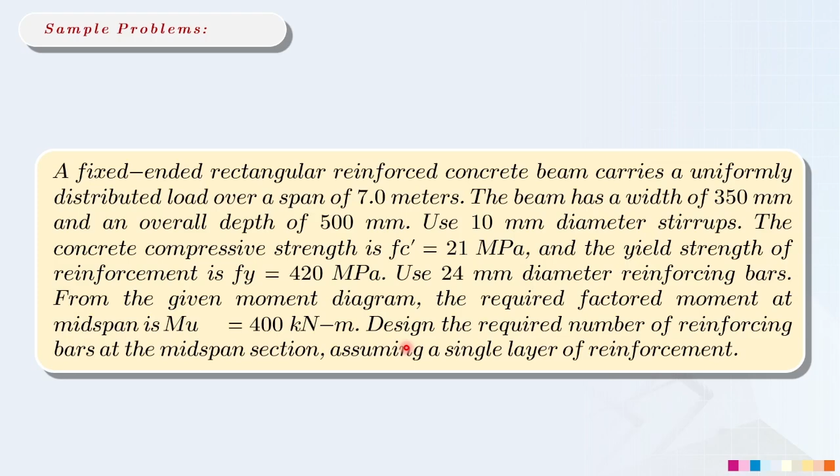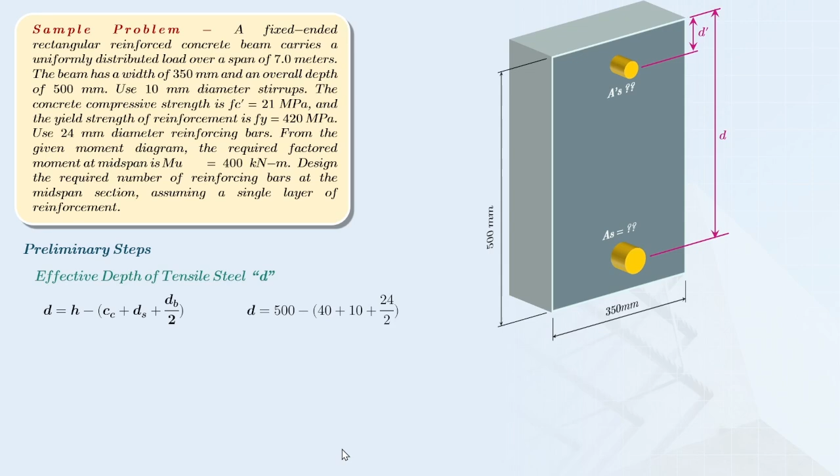So of course, one of the preliminary steps is we need to determine the effective depth at the tension, which is best to assume here that all of the arrangement for our reinforcement is only single layer, either in tension and compression. Okay, so let's determine the location for our effective depth for the tensile steel. So let's substitute all of the values here. So our effective depth is equal to 438 millimeters.

However, we need to also determine the effective depth for the compression steel, just to anticipate if this section qualifies now as a doubly reinforced beam. Okay, so by just simply adding the concrete cover, the diameter of stirrups, and then half of the main reinforcement, ang makukuha nating value dito is 62 millimeters.

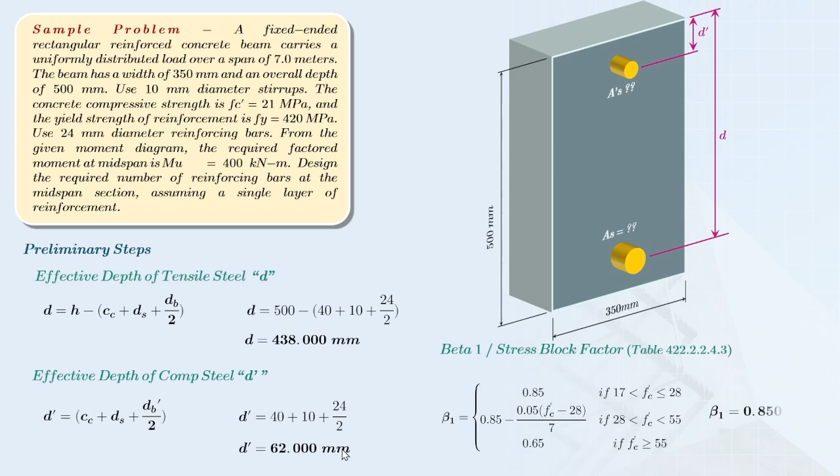Okay? So, one of the preliminary steps, we need to determine the value for our beta 1, which will rely on the value of f'c. However, f'c is 21 megapascal, so that beta 1 is now equal to 0.85.

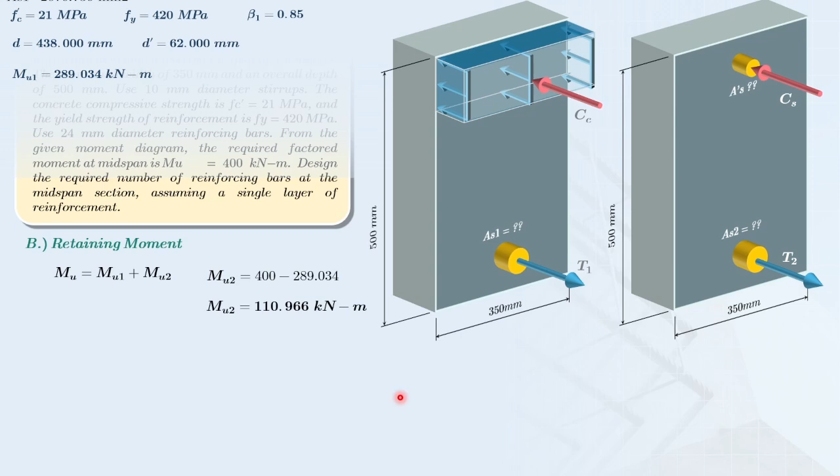So, kapag kinuha po natin siya, ang makukuha nating retaining moment, this is now 110.966 kilonewton meter. Ibig sabihin po niyan, ang sasalo for our design sa ating retaining moment ay yung mga bakal natin dito, especially on the compression steel. So, ibig sabihin, ito na po yung dadalhin niyang moment capacity natin. But first, we need to design for the tensile steel. Kasi yan yung importanteng part natin dito.

Okay, so let's consider from the controlled steel area. Ibig sabihin lang nito, class, is nasa maximum condition tayo. So para makuha ko muna yung first part, computing ko muna using yung steel ratio ng tension control. Then I will equal it to the total steel area. First part pa lang ito kasi nasa concrete pa lang tayo. Then divide lang natin siya together with your gross area B times D.

Okay? So let's cross multiply para makuha ko lang yung equation na magre-represent dito sa first stress diagram natin para kay concrete. Then kapag sinubstitute ko yung mga value para makuha ko yung first part ng aking steel reinforcement on the tension, ang makukuha ko dito is 2,076.736 square millimeter. So yan yung first part. Ibig sabihin, itong steel area na nandito, nire-represent niya yung para sa concrete. Kaso kasi nasa doble tayo. So, kailangan din natin ng second steel area para sa ating compression steel.

Alright, so let's design for the tensile steel ulit. However, ang magiging consideration na natin dito ay yung para doon sa ating second part. Okay, so on this retaining moment natin, ang ginamit ko pala dito by the way is yung kapag nag-moment ako sa compression. Kapag nag-moment ako sa compression, ito yung magiging axial tensile force ko. Then together with the derived natin para sa kanyang moment arm. So para makuha ko yung second part ng aking steel area, ang makukuha ko ditong value is 780.744 square millimeter.

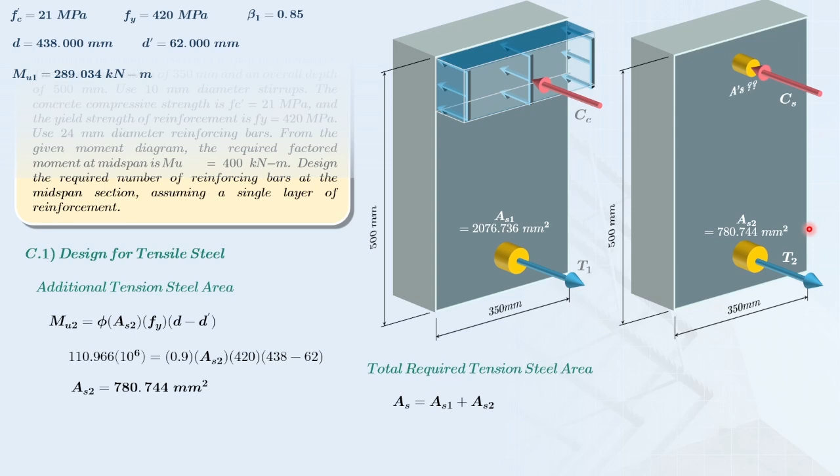So para makuha na natin yung total tension steel area, what I need to do here is ipag-add ko na lang sila. Since dalawa lang, hinati lang naman natin sila sa dalawang stress diagram. So, i-add ko na lang sila so that ang magiging total required tension steel area ko, this is now equal to 2,857.48 square millimeter. So, yan na yung magiging sagot ko, kung ang tanong ay steel area.

So, however, i-design na rin natin dito kung ilang piraso yung gagamitin natin from this total steel area natin. What we need to do here, i-divide lang natin siya sa isang pirasong 24 mm na bakal. So that yung number of pieces, this is now equal to 6.316. Palagi niyong tatandaan, kapag design ng number ng bakal, palagi po tayong round up. So galing sa 6.316 magiging 7 pieces of 24 millimeters. Kaso, please take note, tensile steel pa lang po yan.

Kasi, since tayo ay nasa doubly reinforced beam, kailangan natin i-consider yung compression steel. Para sa ating compression steel, ang gagamitin na natin dito is this formula. Please take note, kinonsider ko dito yung pag-minus ng 0.85 F'C, considering na hollow na po yung area para dun sa concrete. Alright, so let's substitute the value. By the way, ginagamit ko dito ulit ay yung para sa retaining moment. Dito po ako nagbabase ng aking second bending moment or yung ating retaining moment dito sa stress diagram na ito.

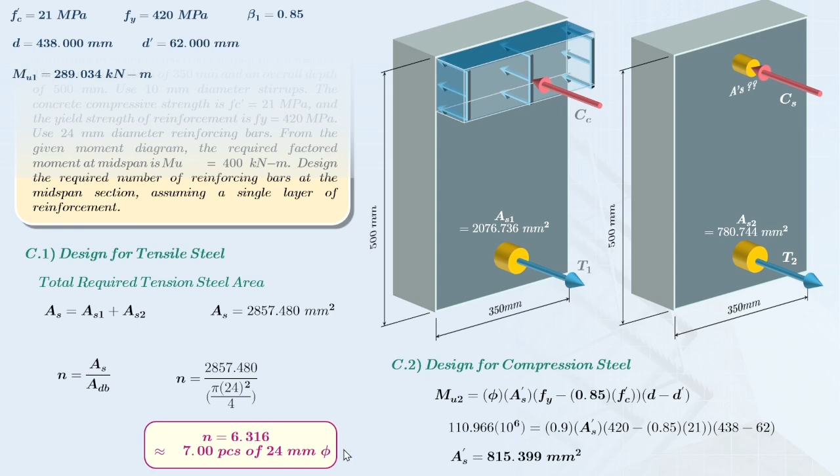So, para makuha ko yung total steel area for the compression, this is now equal to 815.399 square millimeter. Then, para makuha natin kung ilan yung bakal na magkakasya dito, i-divide pa rin natin siya with the individual steel area, or dun sa ating reinforcement na gagamitin natin. So ang lalabas ngayon dito is 1.802, or round up ulit, 2 pieces of 24 mm diameter reinforcement. Palagi ninyong tatandaan, class, kapag number of reinforcement, palagi po tayong mag-round up. And this is our answer for this sample problem.